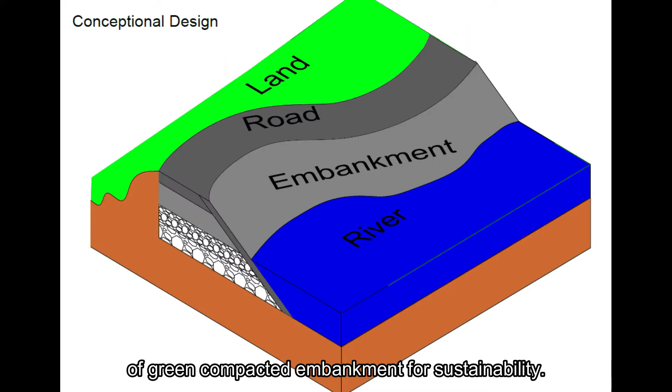Welcome to the feature presentation from Group 2. Our proposed topic for this reel is the construction of compacted embankments. But I would like to galvanize this title and call it the construction of green compacted embankments for sustainability. So the key words here are green, sustainable and embankment.

The word green attributes to green environment, which comprehends the concern of environmental conservation and improved health of the environment. This includes supporting practices like informed consumption, conservation practices and investment in renewable energy. On the other hand, sustainability focuses on meeting the needs of the present without compromising the ability of future generations to meet their needs. The concept of sustainability is comprised of three pillars: economic, environmental, and social.

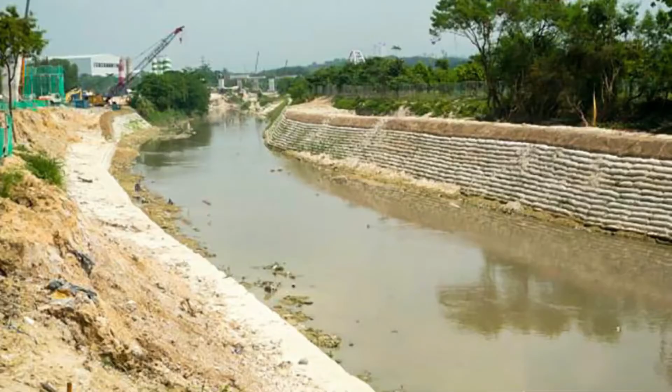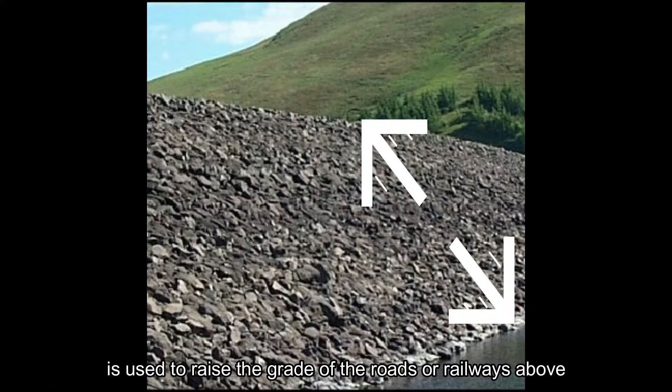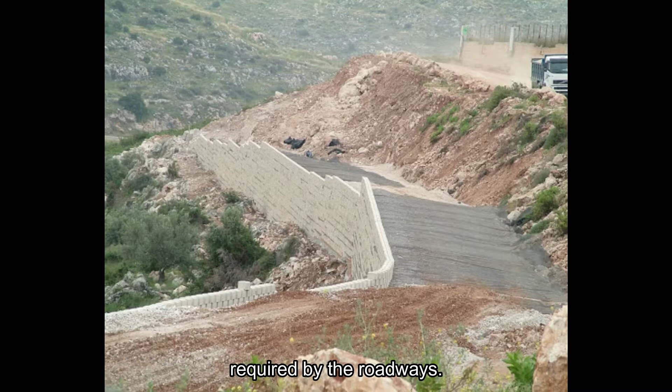But the vital question here is, what is an embankment? The basic explanation of an embankment is that an embankment refers to a volume of compressed earthen materials, usually comprised of clay-like or rock-based materials, which is used to raise the grade of the road or railway above the level of the existing surrounding ground. This is for the purpose of avoiding a change in level required by the roadways. Also, embankment is used in water, where it holds back water from going to the adjacent lands.

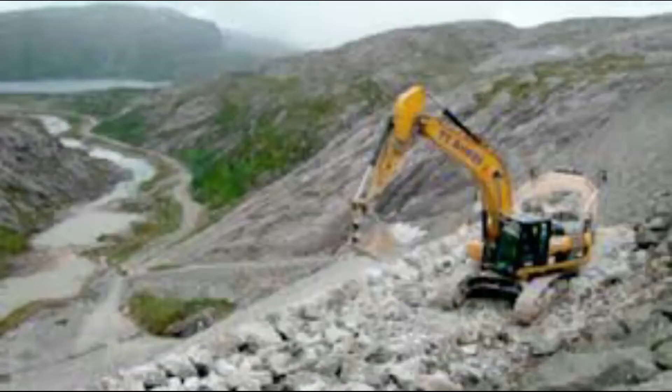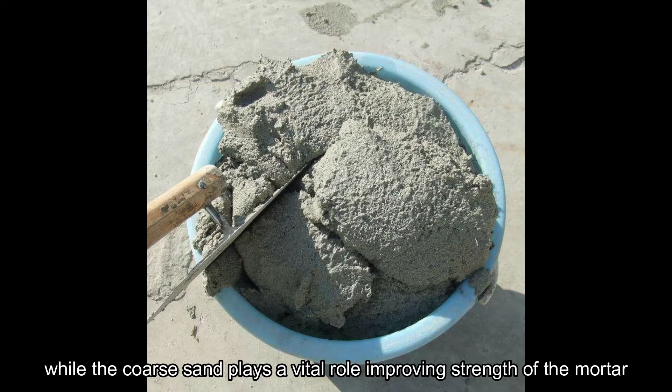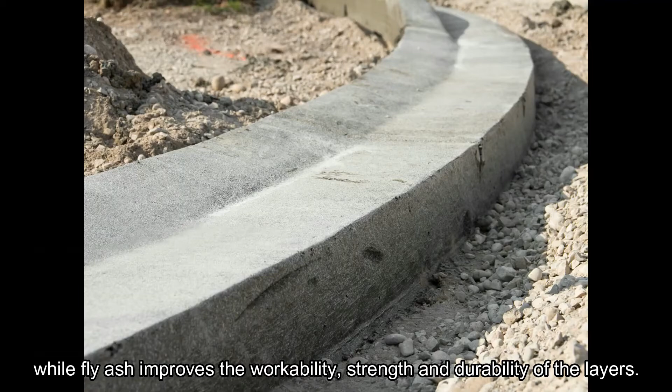In the construction of the embankment, we are going to use fine and coarse sand for the first and second layer. The fine sand gives more stability against sandstorm, while the coarse sand plays a vital role improving strength of the mortar. In the next layer, we are going to use gravel along with fly ash. The gravel along with sand is used to protect the layer, while fly ash improves the workability, strength and durability of the layer in fresh or hardened state.

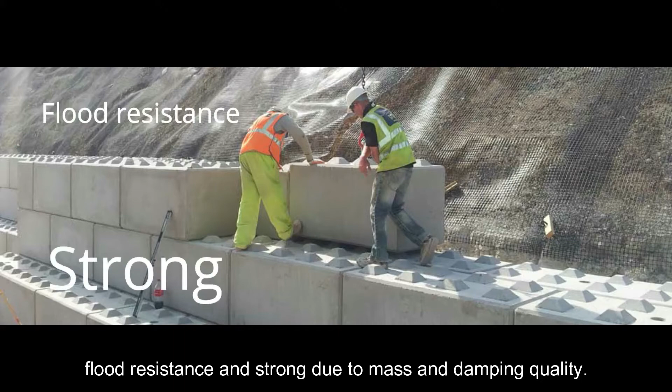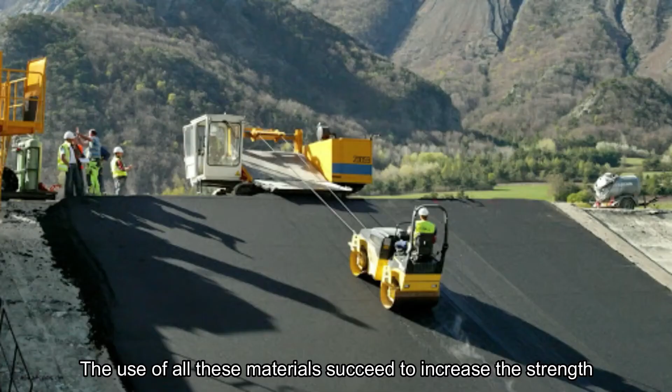For the edge of the embankment, concrete blocks, which are flood resistant and strong due to mass and damping quality. And lastly, for the pavement, we will use asphalt as it creates the smoothest surface for walking and driving. The use of all these materials succeeds to increase the strength and stability factor for the embankment.

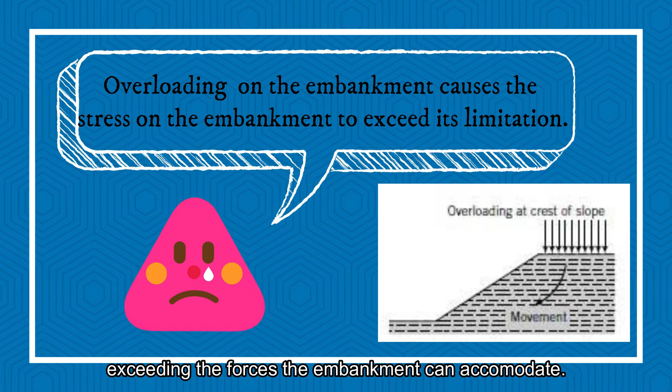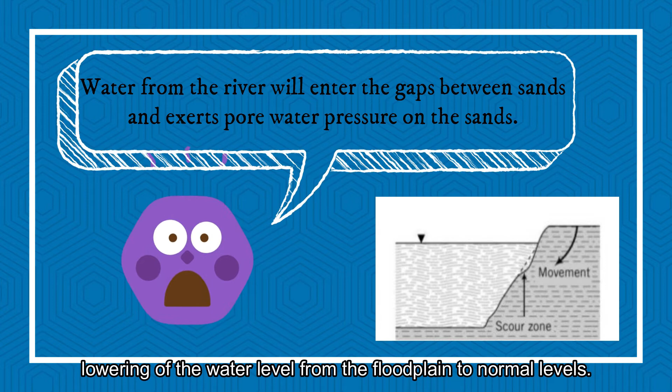The most common geotechnical problems we face in construction of embankment, especially at riverbanks, are erosion and breaching. The geotechnical failures occur due to stresses on the embankment exceeding the forces the embankment can accommodate. For example, oversaturation of the embankment following a lowering of the water level from the floodplain to normal levels. Pore water pressure in the saturated embankment reduces the frictional shear strength of the soil and increases sliding forces.

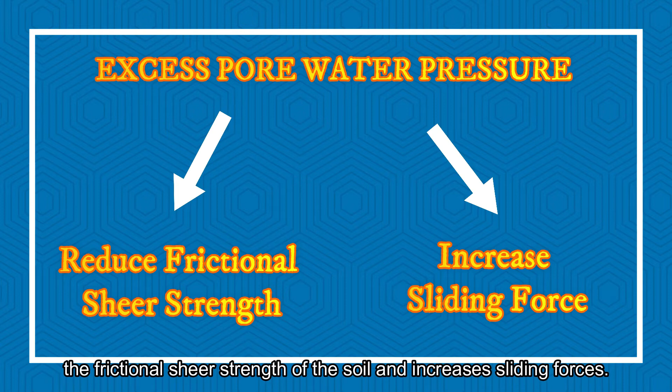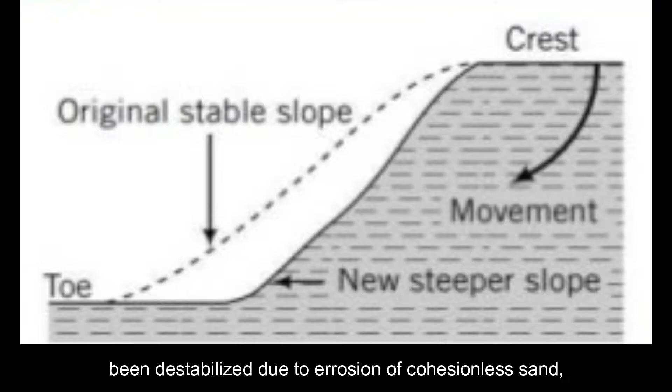This can be accentuated if the embankments had already been destabilized due to erosion of cohesionless sands, which undermines the embankment material and causes the embankment to collapse.

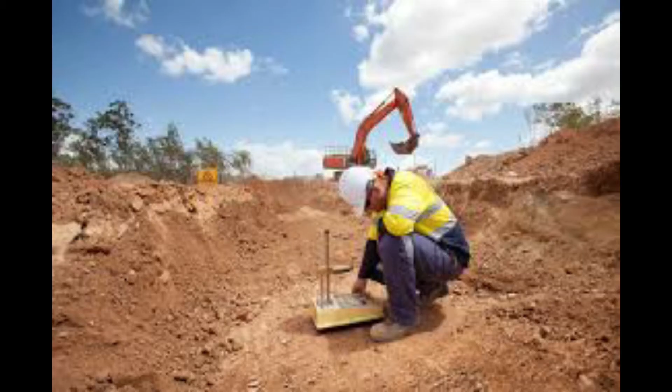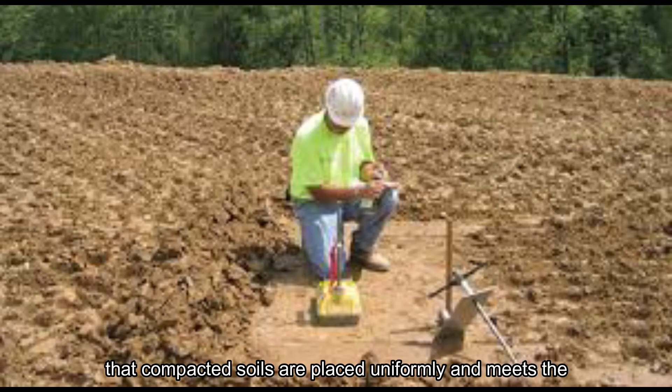Before the construction of embankment, different types of geotechnical construction methods and testing are used to ensure that compacted soils are placed uniformly and meet the requirement of the engineering properties. It is common in embankment construction to prescribe a combination of method and end result specification to ensure the quality of the construction.

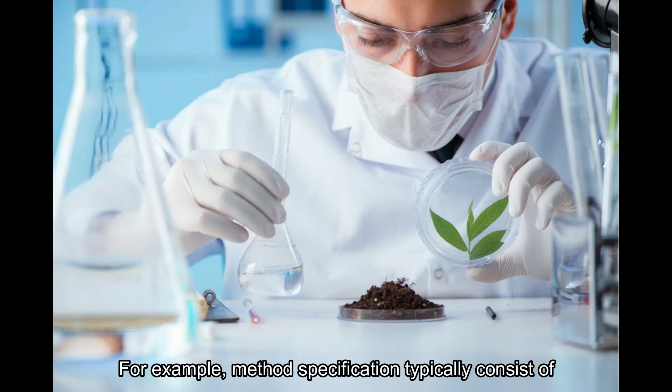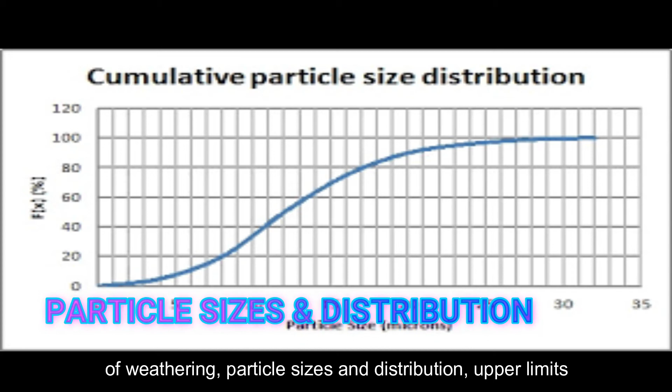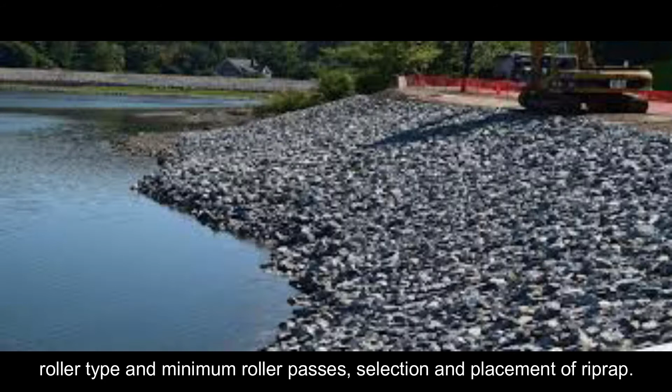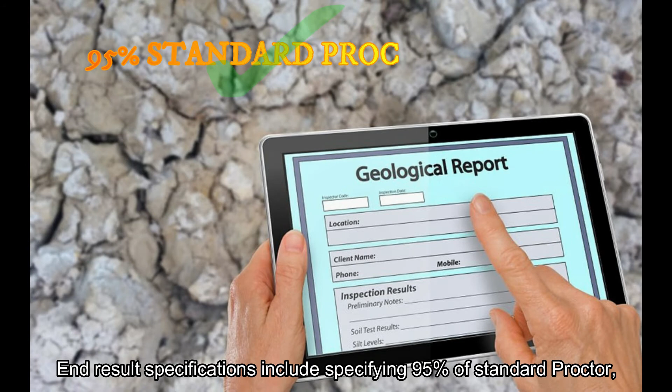For example, method specification typically consists of source of construction materials, type of rocks and degree of weathering, particle size and distribution, upper limits of fines, Atterberg limits, maximum lift thickness requirement, roller type and minimum roller passes, selection and placement of riprap. End result specification includes specifying 95% of standard Proctor test, description of the required soil properties or embankment performance requirement.

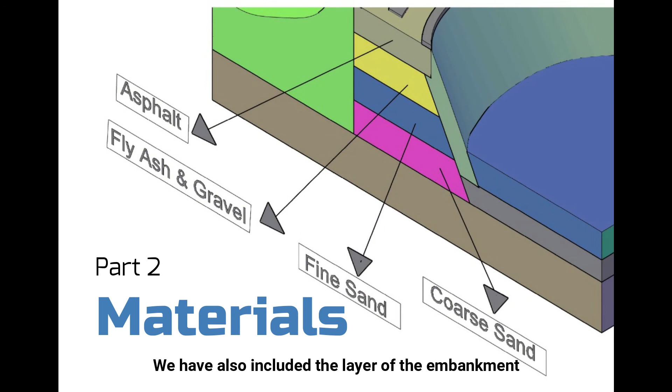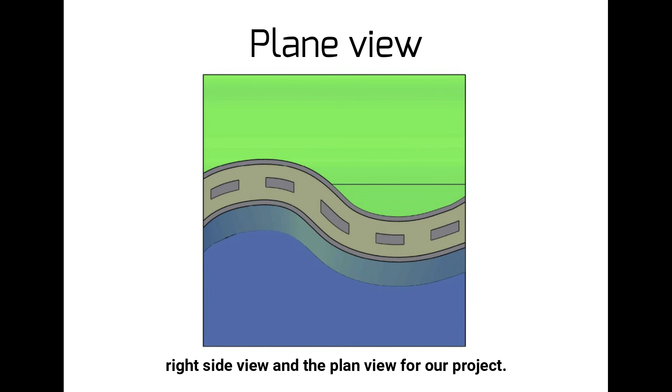So this is the design of our embankment project. We plan to build it beside a river because it is the most common place where people will build an embankment. We have also included the layers of the embankment, where the materials for each of the layers are specified. Besides that, we also include the left side view, right side view and the plan view of our project.